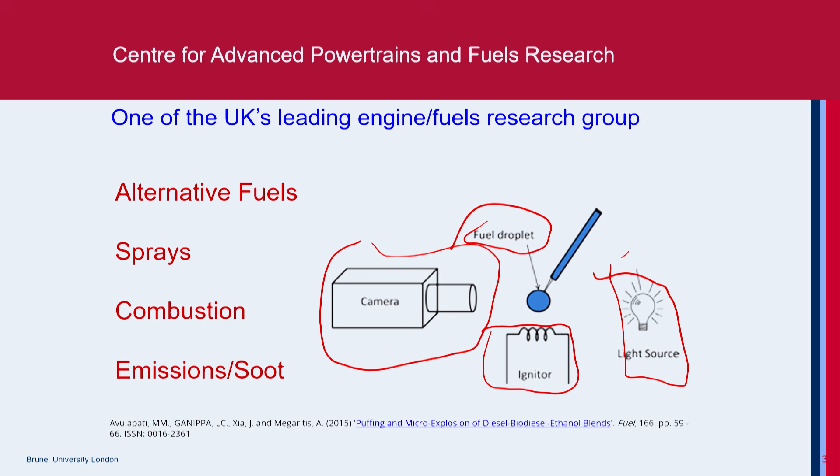Just to give a small setup of the whole lab, I put up some clips of Dr. Madan's experimental work. You'll find this in his paper, which is well cited—a very highly cited paper which we did together at this point. If you have to do any work on fuels, basically you need to have the fuel, a temperature controlled environment, an imaging device, and an illumination source. So this is a simple setup. We have a number of setups with high pressure or reciprocating engines, or at fundamental levels, or even as jet setups.

So that's the background about Brunel and what I'm doing there at Brunel.

So let's go back to the course itself, high-speed flow theory and measurements in jet engines. Often myself and Dr. Madan discuss various research aspects, and this came up, so we thought we'll propose something on this. The topics that will be covered are given there.

We look at the overview of the gas turbine propulsion systems this morning, where we look at the turbojet, turbofan, turboprop, turboshaft, not in detail, just an overview. Then this afternoon, we look into the combustion in supersonic and hypersonic engines based on the Rayleigh flow theory. The course will also cover shock waves and the application of shocks in supersonic inlets. We'll also look at the nozzle flow under supersonic conditions, ramjet and scramjet, and the major part of it is also measurements, where we look at the various optical measuring devices and measuring techniques in this course.

So this is the typical content of this course. Okay, now let's go into today's topic.

It is the overview of gas turbine engines used in aircraft propulsion. So let's start with the basic principle of propulsion.

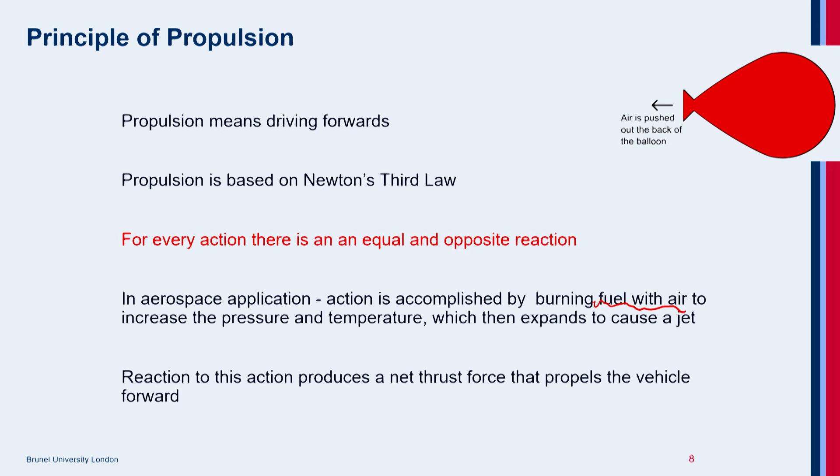Okay, so this is the basic principle of propulsion. Now, if you look at the classification of aircraft propulsion, basically you can classify them into two: air-breathing propulsions and non-air-breathing propulsions. I need not tell anything about rockets, because Sriharikota is not very far from your place, you're pioneers on rocket launching, but for this course we are going to look only at the air-breathing engines.

Until 1940, people were fighting, oh, we need to have a two-stroke engine, we need a four-stroke engine, an air-cooled engine, a water-cooled engine, a rotary engine. Much of the research was focused on reciprocating internal combustion engines since before 1940. Since 1940, the gas turbine developed and jet propulsion starts picking up, and not much talk is there, but still there are a few aircraft with reciprocating engines for training purposes. So we will be focusing more on the jet propulsion engines.

Within that, we'll be looking at gas turbine based propulsion today, and then we will look at ramjet, scramjet. If time permits, we'll look at the turbo ramjet also. Okay, so this is the overview which we'll be covering this morning.

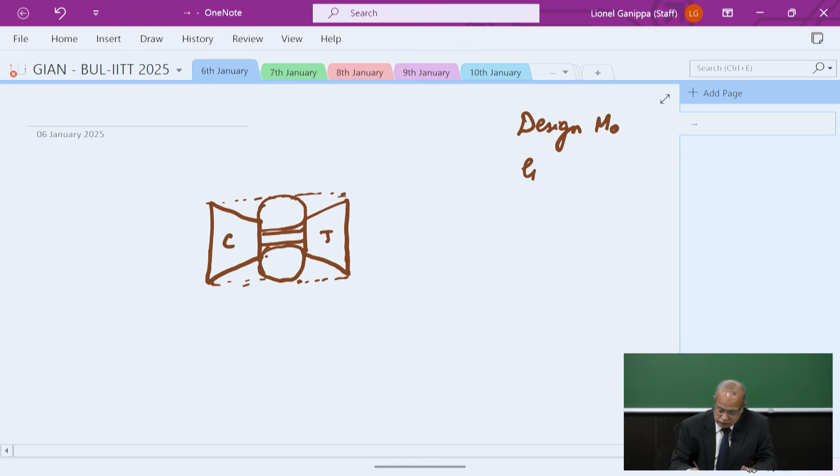Now you need to size these components. This sizing depends on what is the design Mach number, what's the design speed at which you want to fly the aircraft, what is the gross takeoff weight you want to lift, and what is the transonic acceleration - how quickly you want to go from Mach 0.9 to 1.1 or 1.2. That's what we mean by transonic acceleration.

Depending on that, we define the pressure ratio of the compressor, the adiabatic efficiency of the compressor, the amount of fuel injected into the burner, the air to fuel ratio in the combustor, what type of thermal barrier coating we need on the combustor, what is the thermal limit denoted by tau suffix lambda, the maximum temperature the combustor can operate at, the pressure ratio across the turbine, and the adiabatic efficiency of the turbine. I can keep going because they are made up of a number of stages - stage efficiency, number of blades, and blade profile.

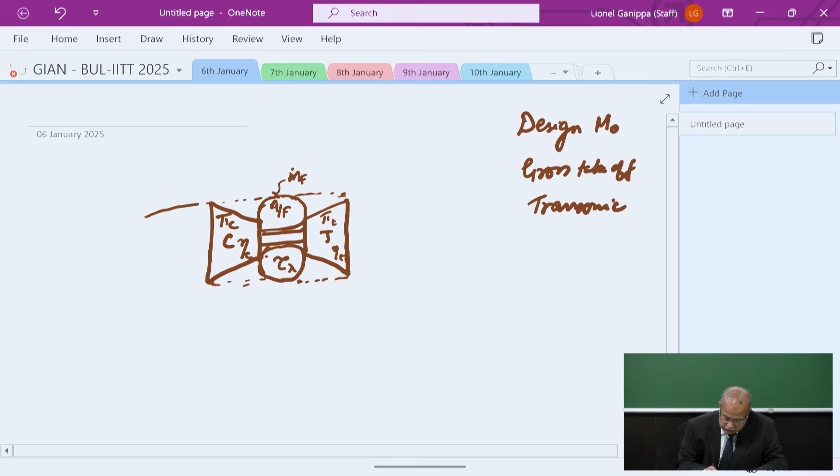This is the fundamental aspect of it. This is called the gas generator. Now if I add an inlet to it, and if I add a nozzle to it, this becomes a simple turbojet engine. So here is the inlet, and here is the compressor.

You're able to see what I was writing out has disappeared. So this is the inlet. So this is the simple turbojet engine. So here is the nozzle here.

The standard aerospace recommended practice is that this is the atmospheric environment at which the aircraft is flying - the unperturbed condition, station 0. Inlet lip, here is the front of the compressor. So exit of the compressor and inlet to the combustor. Exit of the combustor and inlet to the turbine. And here is the exit of the turbine, station 5.

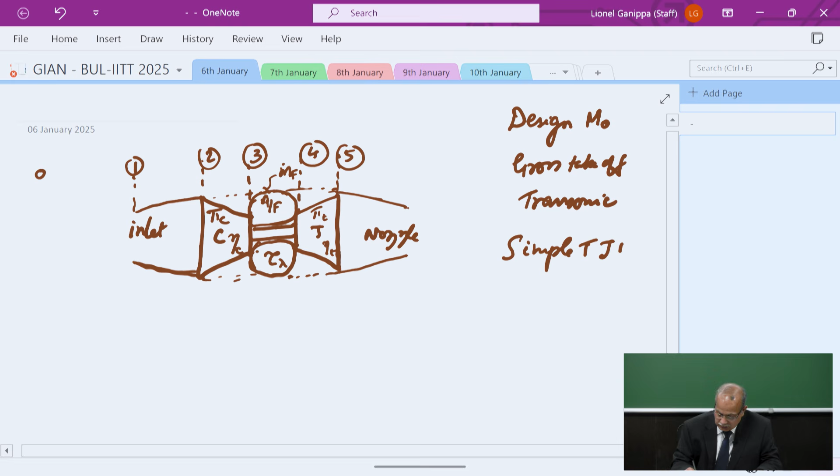Now as I did mention, this is a simple turbojet engine, which we are going to develop further. So there will be some components coming between station 5 and the exit, station 9.

So this means that an aircraft is flying at flight static conditions. The pressure will be P naught, the temperature will be T naught, the density will be rho naught, and the velocity will be V naught, with the corresponding Mach number M naught.

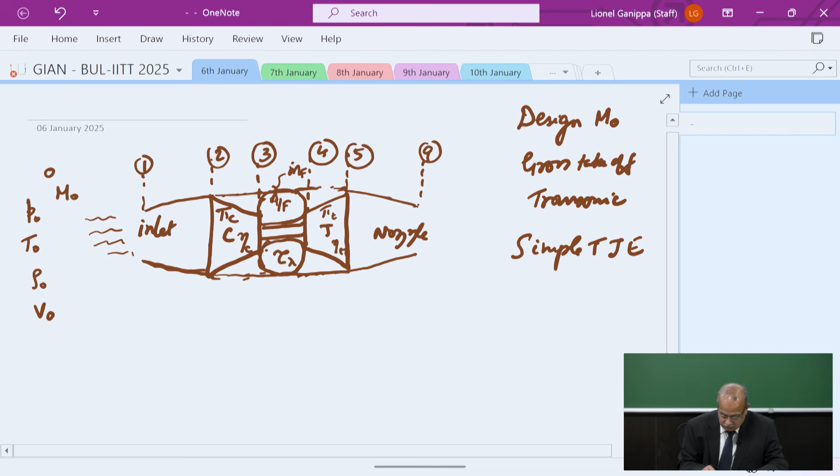So when the air enters into the engine, you can see that the function of the inlet is to decelerate the flow. We are now looking at a subsonic flow. The flow enters into a diverging geometry. So as the flow enters into this engine, what will happen? The velocity decreases.

What is the effect of a decrease in velocity? When I talk about velocity, there is a kinetic energy associated with it, a specific kinetic energy. At this point, the kinetic energy decreases. Here is where the principle of conservation of energy comes into picture. The energy decreases in one form and disappears, but it reappears in some other form, which causes the pressure to increase.

So that is the main function of the inlet - to decelerate the flow, make use of that kinetic energy, and increase the pressure. The whole objective is to improve the efficiency of the combustion process. We need high pressure into the system, so we increase the pressure. At the same time, we need to minimize the losses. That is the main function of the inlet.

Then the air passes through the compressor based on the pressure ratio of the compressor, which is again designed based on the flight speed. As a rule of thumb, the faster you go, you don't need a high pressure ratio because you get the ramming effect there. So based on the pressure ratio of the compressor, you increase the pressure and feed that high pressure air into the combustor.

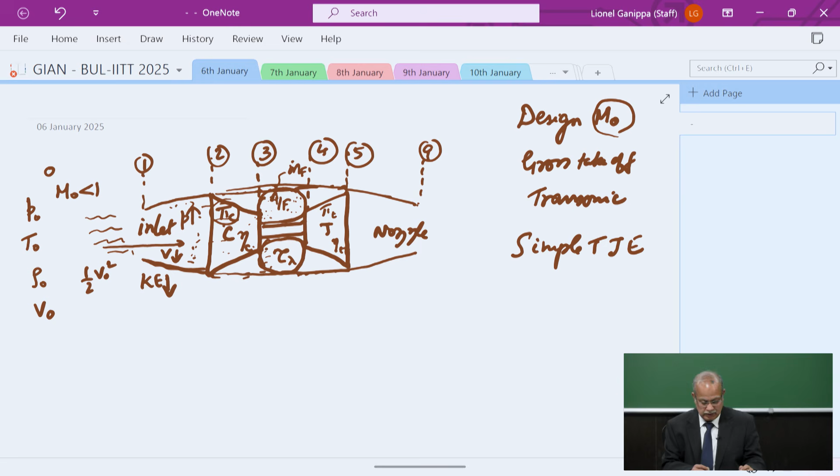Fuel is injected, and fuel and air is mixed into the combustor and burned to high temperature. That maximum temperature is limiting because although it is good to have high temperature, the limitation is material limitation. So we have this thermal barrier coating on these combustors.

The high temperature burned gases will expand through the turbine, and that turbine will produce some work. The work produced by the turbine is used to drive the compressor. Now, the amount of energy left over will be expelled out of the nozzle, and you have this velocity of gas exiting, V9.

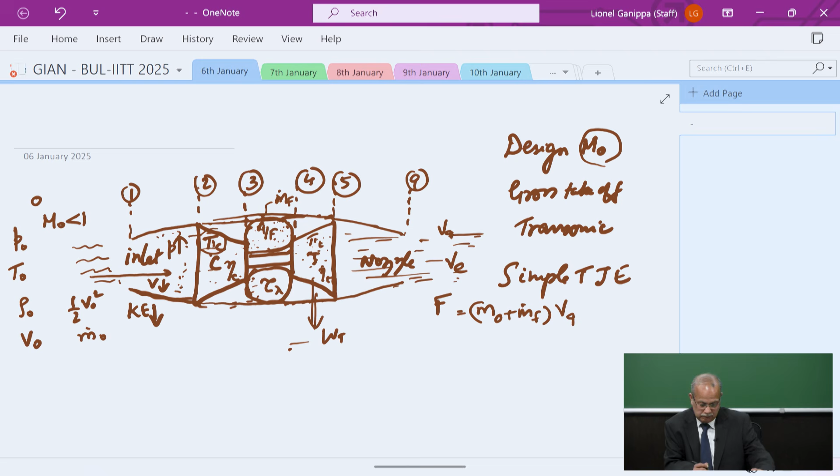Then you produce the thrust, which is equal to the mass coming in, m dot naught plus m dot fuel. This is the gross thrust produced by the engine. So this is the basic principle of operation of a turbojet engine. Now let's try to look at it from a thermodynamic point of view.

So on the y-axis is the enthalpy, on the x-axis is the entropy. This is the unperturbed free stream condition, where the pressure is flight static pressure P naught. Let me represent it on an HS diagram. This is the pressure P naught, and these are the isobars going in this direction.

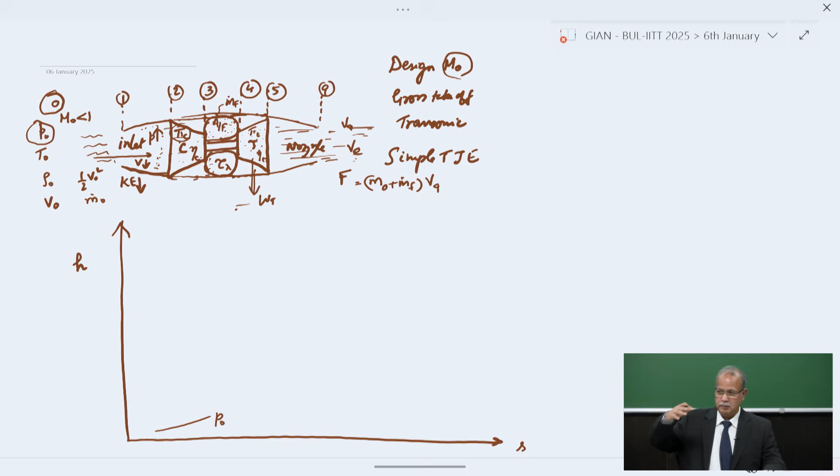Now it is flying at a certain environmental pressure and at a certain temperature. So this is the temperature, T naught. When I say enthalpy, which is nothing but CPT, I can write it as T. Cp is constant here in this case. So here is S naught. These are the initial conditions, the flight static condition O.

Now imagine we are not even going into the engine. I'm going to put a pitot static tube outside. So what will happen here? The flow, if I put a pitot static tube in the flow direction, coming at a velocity, let's say Mach 0.8. Eventually, when it approaches the aircraft at the pitot-static tube, the flow will decelerate, which means the kinetic energy is being lost. Eventually, it comes to the point at the tip where the velocity is zero.

When the velocity is zero, it is referred to as the stagnation state. This process of flow deceleration could be treated as isentropic, so it's an isentropic stagnation state. I'm going to plot that point here. So here V naught is equal to 0, and going to the corresponding pressure is the total pressure, stagnation pressure. So the pressure will increase, and eventually I will have this pressure.

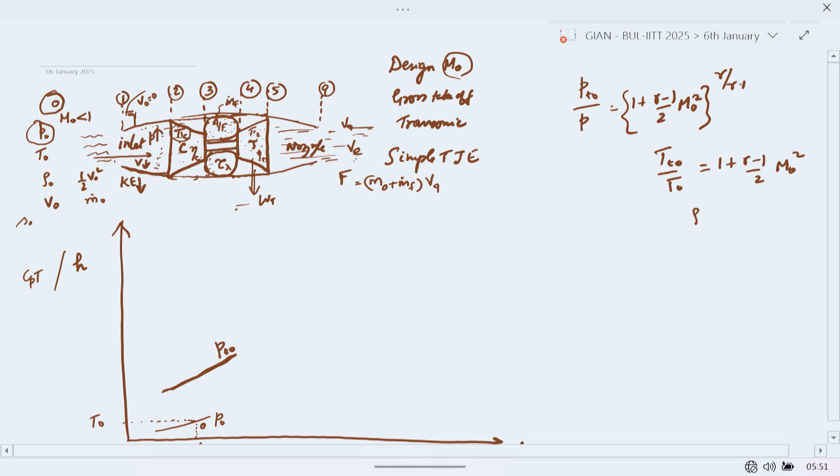So this is PT naught. There is a relationship between this stagnation pressure to static pressure, equal to 1 plus gamma minus 1 by 2 M naught square, power gamma by gamma minus 1. There is also a relationship for Tt naught by T naught, between the local property and the stagnation property, equal to 1 plus gamma minus 1 by 2 M naught square. Similarly, you could say for density also, with 1 by 2 M naught square power 1 by gamma minus 1, but we are not going to look at that.

So here is the static pressure, and this is the corresponding isentropic stagnation condition, and this is the isentropic stagnation enthalpy HT naught. One of the things even in real life applications is the inlet is treated as adiabatic, and also the nozzles are treated as adiabatic. So here it is adiabatic, and here also it is adiabatic.

Now this magnitude is the thermal energy, thermal energy H naught at which the flight enters in. So this is the point here. We have this flight entering at Mach M naught. So here is the thermal energy.

Now here at this point, this is the kinetic energy, which is half V naught square. So what I am writing here is H naught plus half V naught square, which is the energy balance equation, which is the total energy. That's what I write in here now. So it's H naught plus half V naught square is the total energy, and total energy remains constant here.

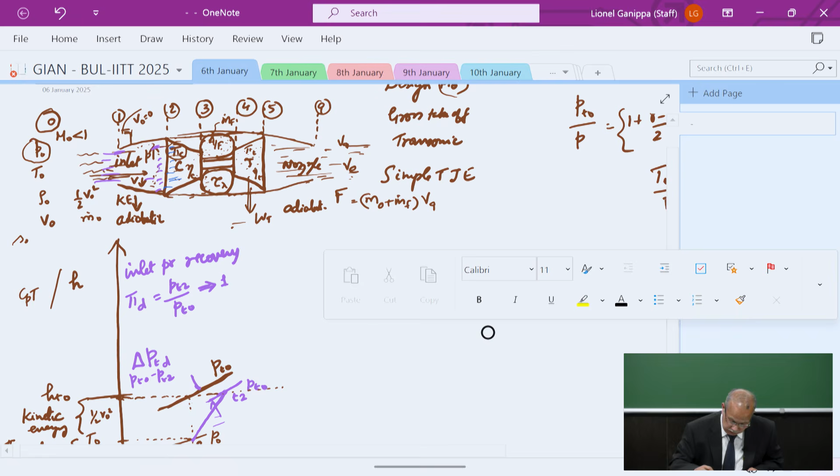So now at this point, air has gone through the inlet and is about to enter the compressor. Depending on the pressure ratio, you have this pressure here, PT3. In the actual process, there will be a number of small stages, and this is how the pressure increases in the compressor, passing through stage, rotor, stator arrangements. The pressure increases to PT3, which depends on the pressure ratio of the compressor and its adiabatic efficiency.

Once air has entered the compressor and is pressurized, it enters the combustor where air and fuel are injected. Combustion takes place at constant pressure, but in reality there will be a pressure loss, delta P, the total pressure loss in the burner. So here it is PT3, and here this is T4, here it is T3. This is where the fuel is injected, mass of fuel is injected, and fuel and air mix to form an appropriate mixture, which then burns and increases the temperature.

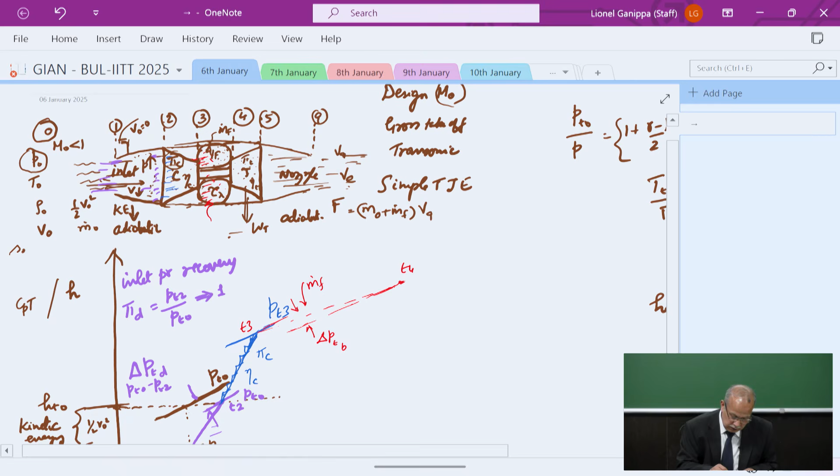After which it will expand in a turbine, depending on the expansion ratio of the turbine, reaching pressure PT5. So here is pressure PT4, pressure PT5, this is the state T5. Then whatever energy is left will be expelled out of the nozzle, expanding to the ambient conditions, flight static P9. So it starts with a static pressure, goes to stagnation, then ends up with 1 here. This is the nozzle pressure ratio, the total pressure ratio across the nozzle. These are all geometrical parameters related to the nozzle, and it expels out at this point with velocity, from which we can calculate the thrust and so on.

So this is the typical cycle diagram of a simple turbojet engine.

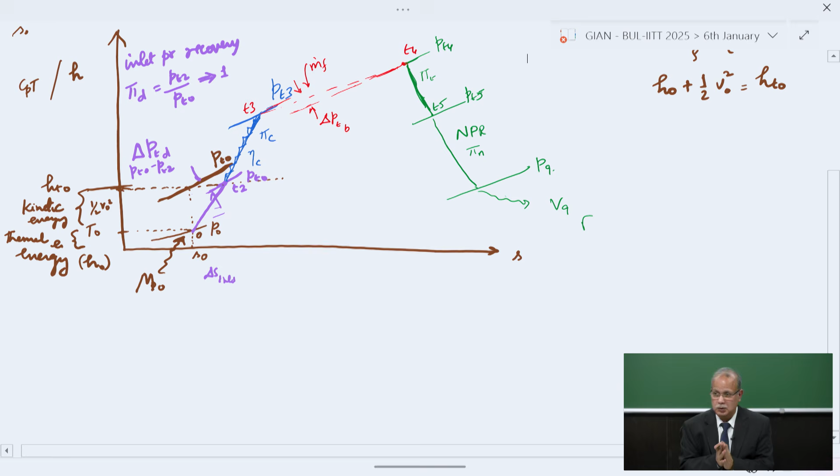Now let's look into the development of this simple turbojet engine, because not always do we want to operate it like this. At times, if there's a sudden threat, you need to escape — that's what we call a dogfight, one aircraft chasing another. You drop the bomb, your adrenaline level goes up, and you have to take a steep climb. In that case, you can't perform that maneuver with this existing engine.

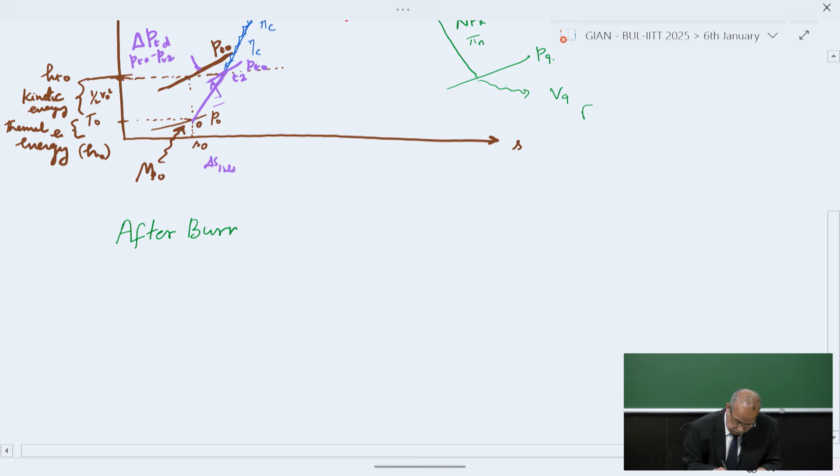So you need to modify the engine by including a component called an afterburner. An afterburner is a device that could be fitted to this simple turbojet engine so we can have thrust augmentation. If you're going to double the thrust, the fuel consumption will quadruple, so we can't always use the afterburner. You use it only for a very steep climb or emergency conditions, and then switch it off.

The afterburner has some casing, an outer casing. It has a perforated liner, and before the charge enters, it also has a pre-diffuser.

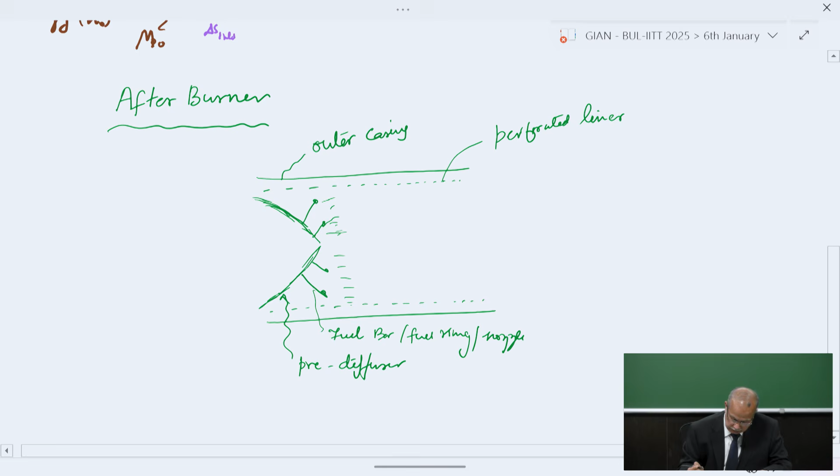Now we want to make sure that the flame is there in this combustor, participating in the combustion. To do that, we need something called flame holders. The function of the flame holder is to create a local recirculation zone, which increases the residence time of the fuel and air to be mixed and burnt, producing a much higher temperature, which must then be expelled out.

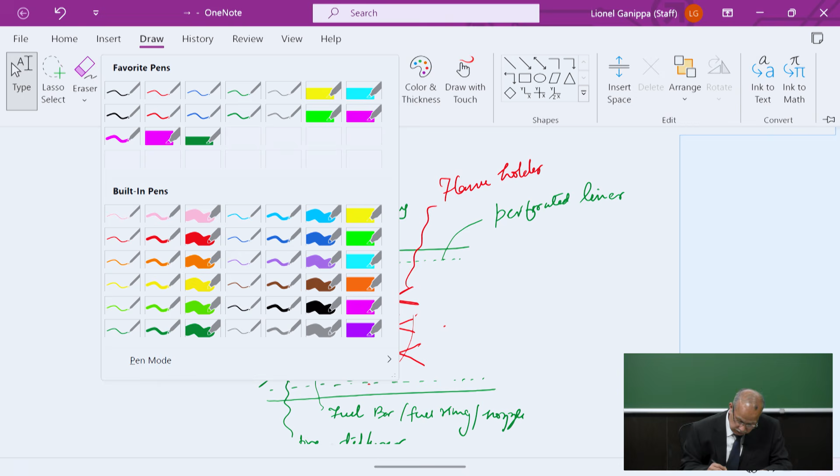To get the benefit, we need to go for a nozzle which is of convergent divergent geometry. When you have a convergent divergent geometry, Mach number will be less than 1 as the flow passes through it, approaches M equal to 1 at the throat, and then it accelerates to M greater than 1. So you have the benefit of momentarily boosting and augmenting the thrust to go to high subsonic or low supersonic speeds.

So this is the afterburner. Now where is this afterburner going to be fitted in this engine? Let's look at this one here.

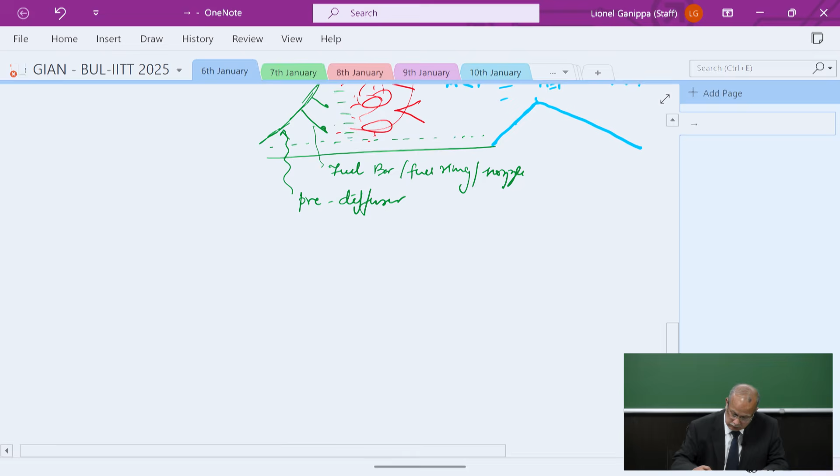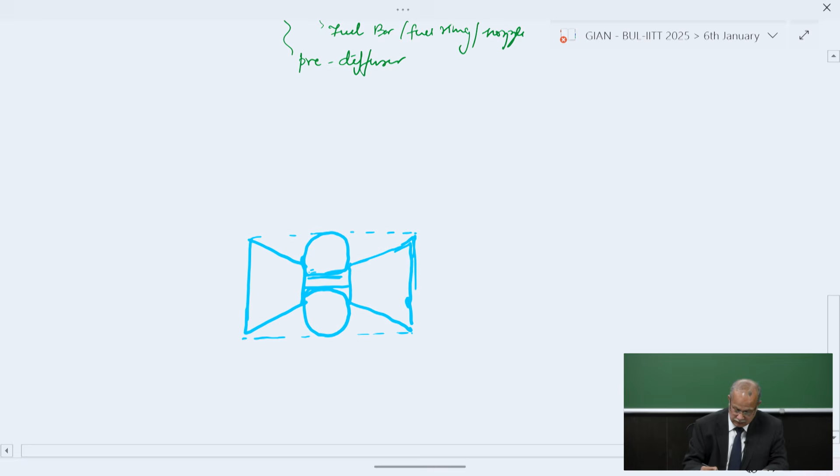As we discussed before, here is the compressor, here is the turbine, and this is the combustor. This is basically the gas generator, and this will have an inlet. This is the shaft that couples the turbine and the compressor.

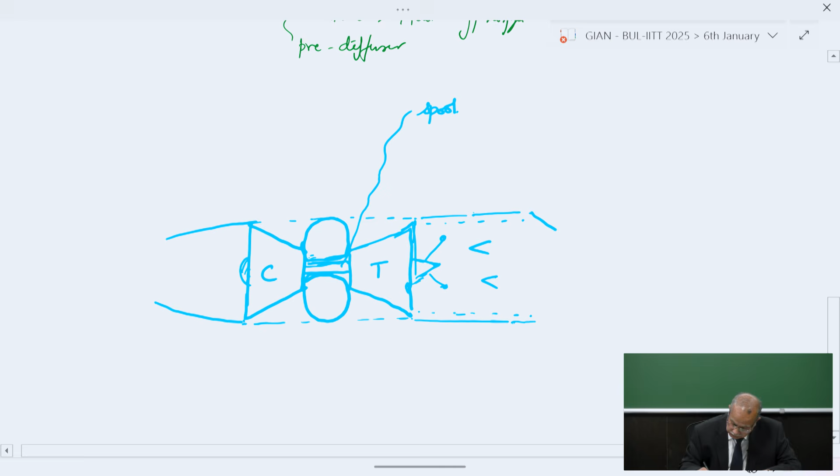Sometimes this shaft is also called a spool. And here is the fuel bar, and this is the afterburner with a perforated liner in it. And then you have this convergent divergent geometry.

Here you can see the unperturbed free stream condition. This is the inlet lip, the frontal face of the compressor. Here is the end of the compressor and the combustor. Here is the burner, so here the mass of fuel is injected.

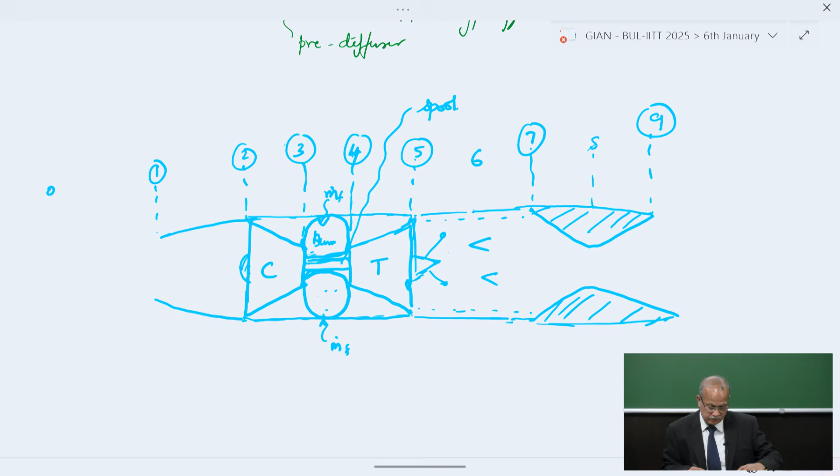And it is burned. Here it is station 4, and here it is station 5. Now the whole afterburner unit is treated as a pipe with an afterburner device, and here is the 7 end of the afterburner combustor. This is the throat, area 8, and this is 9. So you can see that a simple turbojet can be modified by including an afterburner.

If we include the afterburner, we are able to momentarily increase the thrust. The benefit can be obtained by having a convergent divergent nozzle, which we'll be discussing a bit later on. Now let's look at the cycle diagram for this application.

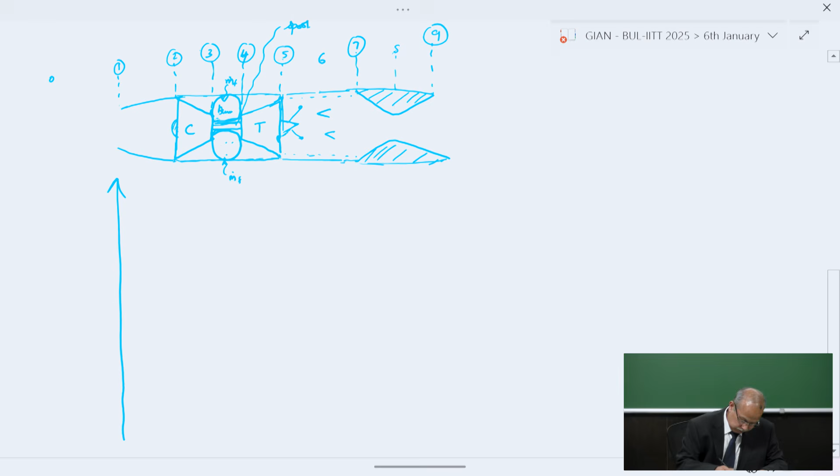So here is the enthalpy, this is the entropy diagram. Here are the unperturbed free stream conditions. Here is H naught, thermal energy, S naught. Now here is the flight stagnation condition, PT naught corresponding to T naught. The total energy in the inlet is constant.

So this is the pressure PT2 at the face of the compressor, state T2. This is the point here, T2. Then the charge will enter into the compressor. It will be pressurized. Here it will be pressure PT3, and here is the state T3. So this is the state here, total state 3.

Then in the combustor, this is the actual path through which the combustion takes place. This is the pressure PT4, this is the state T4. In other words, this is the maximum thermal limit, which is denoted by tau lambda. Tau lambda is basically the enthalpy at this particular point: HT4 over H naught. That is the maximum, in non-dimensional form. So maximum temperature, or cycle temperature, or maximum turbine inlet temperature — these are the various terminologies here.

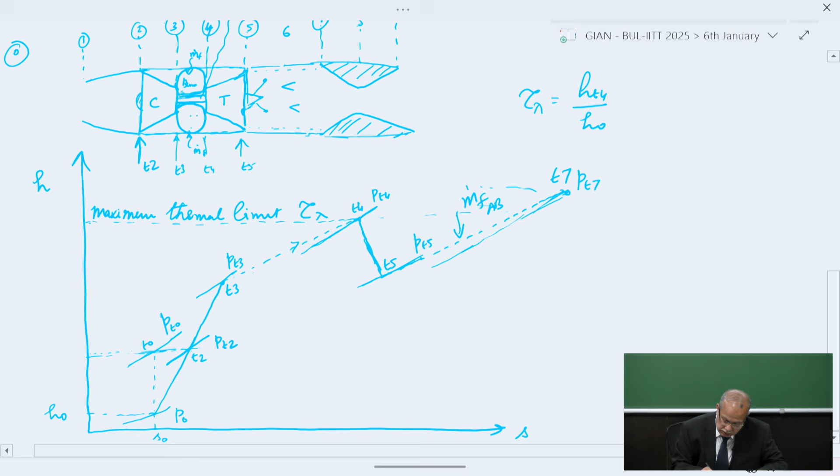Now it enters into the afterburner, so here again fuel is going to be squirted out. The pressure at the exit is PT7. Here combustion is taking place with the mass of fuel injected in the afterburner. So this is T7. You can see that, depending on the combustor properties, you can go up to this level, or keep it to the same level as the previous combustor thermal limit. Anyhow, to differentiate it, I can say this is the thermal limit in the afterburner.

Then it expands in the convergent divergent nozzle, so you're able to produce thrust here, down to the P9 point. So this is how the cycle diagram will look like for a simple turbojet with an afterburner. So we got some fundamental understanding now. Now let's go into the real applications of it.

So this is the inlet, and the screen has changed now. Yeah, you will see — here is the inlet. This is the part of the inlet here.

So all the process I've explained, the physics is happening here. The kinetic energy is utilized to increase the pressure. And then you see this compressor. The compressor which is closer to the combustor is normally called the high pressure compressor, and the turbine which is closer to the combustor is called the high pressure turbine. We'll come back to this later.

Now the air that is being pressurized in the inlet is being further pressurized in the compressor. So it's an axial flow compressor, and the direction of flow is in this direction. There is rotation - you have a rotor blade and a stator blade. The rotor will apply the force and increase the pressure, and the stator will be shaped as a diffuser, increase the pressure, change the flow, and feed the flow into the next stage of a rotor and a stator. So that's how it is.

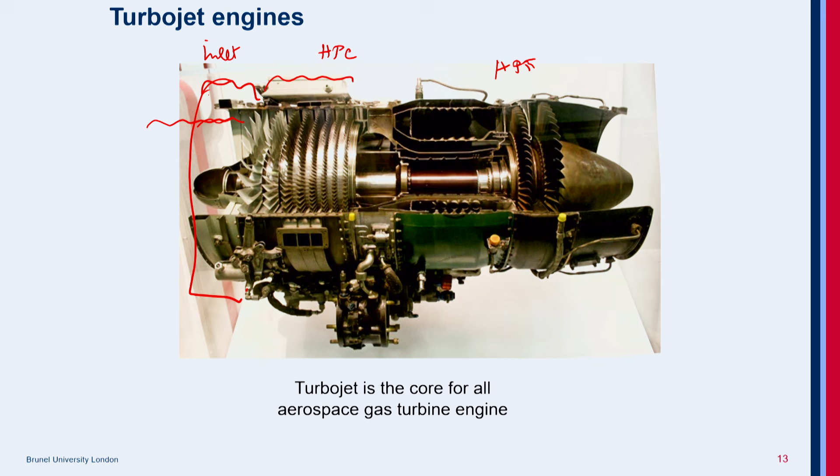So a rotor and a stator comprises one stage. A compressor will have a number of stages, maybe 8 stages, or it can have 2 sets of compressors: low pressure compressor and high pressure compressor. So depending on the number of stages or number of compressors, the pressure ratio will vary.

So the high pressure air that is pressurized further in the compressor, after coming from the inlet, will enter into the combustor. This is the combustor. Here the fuel is injected and mixed, and it is burned to have an optimum fuel air ratio. F is the fuel air ratio, which is the mass of fuel by mass of air.

And then the burned gases will be directed to the turbine where you get the power. That power is transferred to the shaft to drive the compressor. The amount of energy that is left out is going to be expelled in the nozzle.

Okay, so now let's look at the general working principle of the jet engine. Air is admitted from the surrounding environment to the front end of the engine, which is the intake. All the blue part is the cold section of it, and the red is the hot section of it.

Now, most of the time, the function of the inlet is to decelerate whatever the Mach number is. Say if the flight Mach number is 0.89, it has to reduce it to Mach 0.4 to 0.5 or 0.6, because most modern compressors can handle flow only up to that range. That's the main reason for having an inlet - otherwise it can damage all the blades. So we decelerate the flow in the inlet such that the Mach number is at the right range so it can be handled by the compressor.

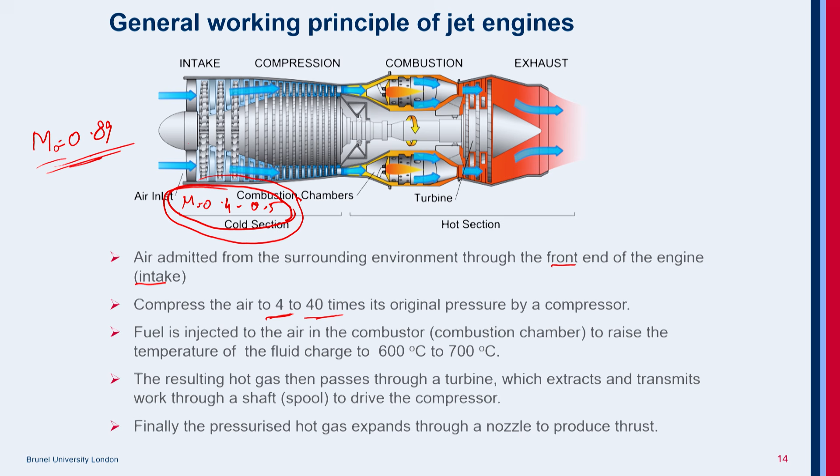Okay, in the compressor the charge could be pressurized. Modern compressors can go up to 40-45 times the pressure ratio. That's the term I've been using here, so this is pi c equal to maybe 45 or something - that's the maximum limit.

Then the pressurized air enters into the combustor and the fuel is injected and mixed with the air, and again the temperature increases depending on the mixture, fuel, calorific value, and other aspects. Then the hot gases will expand through the turbine, which extracts and transmits work to the shaft to drive the compressor. Finally, the pressurized hot gases expand through the nozzle to produce thrust.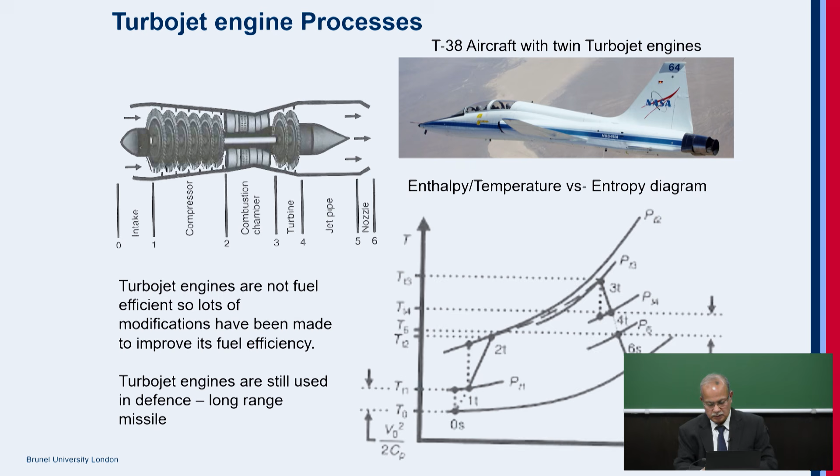So the schematic we explained before is now a bit clearer here. These turbojet engines are not fuel efficient, so a lot of modifications need to be made to improve fuel efficiency. But they are still used for defense applications because fuel consumption is not an issue there, and also for missile applications. I have explained this process of enthalpy and entropy separately, so now it's much easier to understand looking at the global scale here.

Now, one of the ways you can modify a simple turbojet to augment the thrust is to include an afterburner. So here is this simple turbojet, and here is the one with the afterburner.

So here is the afterburner device. This is the fuel bar which I mentioned, you can see that here. This is the fuel bar, and this holds the nozzle, and here are the turbine blades - you can see this here. The turbine blades will direct the air to the afterburner.

So the cycle diagram, after it has expanded to PT3, PT4, then it will have a combustion process in the afterburner, then expansion will take place. This is how the cycle diagram will look. Understood?

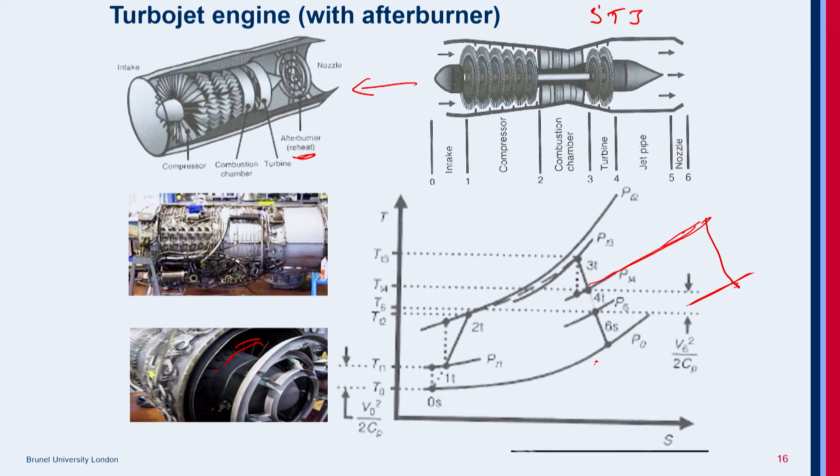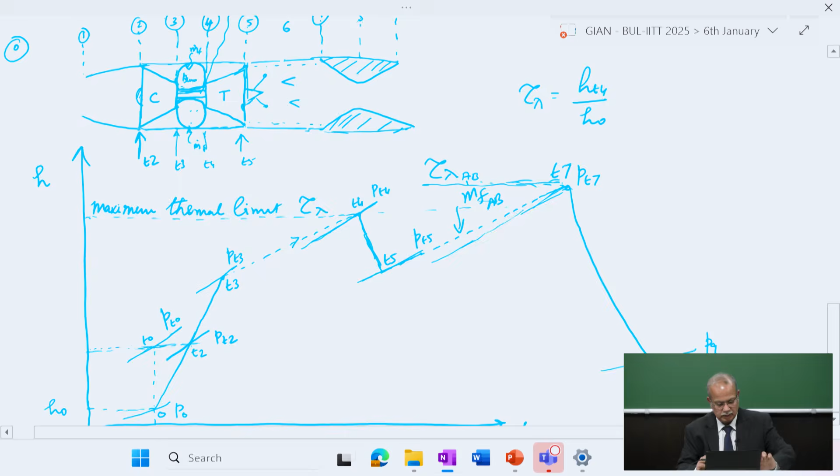So now let's look at the modification of a turbojet engine. Most commercial aircraft are really concerned about fuel consumption. They put a lot of fuel tax because they want to make sure they are fuel efficient. So let's see how the principle works - it still has the gas generator.

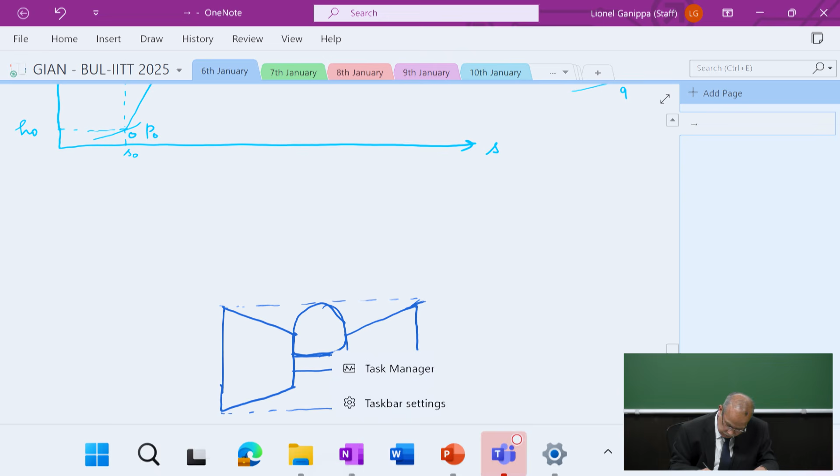Here is the combustor. So here is the compressor. Here is the burner. Here is the turbine.

This is the gas generator. So the principle of going for a turbofan is basically an energy recovery process.

The energy, this is the gas generator, we have seen already. Any further energy that is left out, energy that could be harvested, is done through incorporating a turbine, which is called the low pressure turbine or a free turbine. Sometimes it is also called the power turbine.

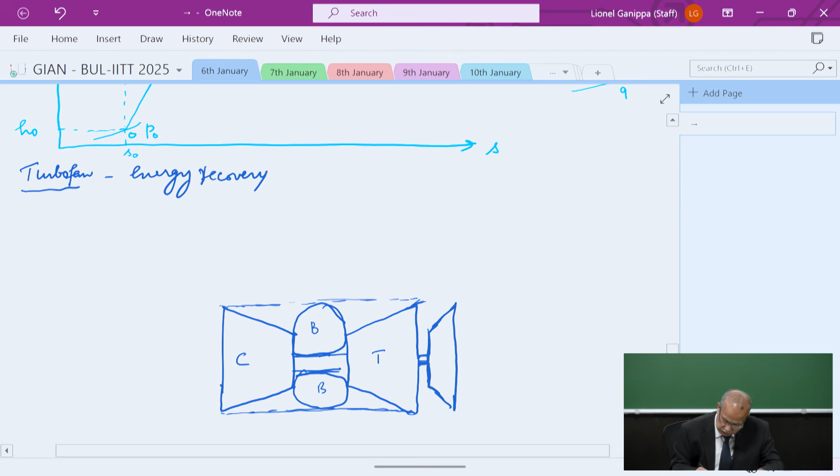Now you can see that this shaft is of different coupling to this one here. Now use this shaft power to drive a fan, and place the fan inside a duct.

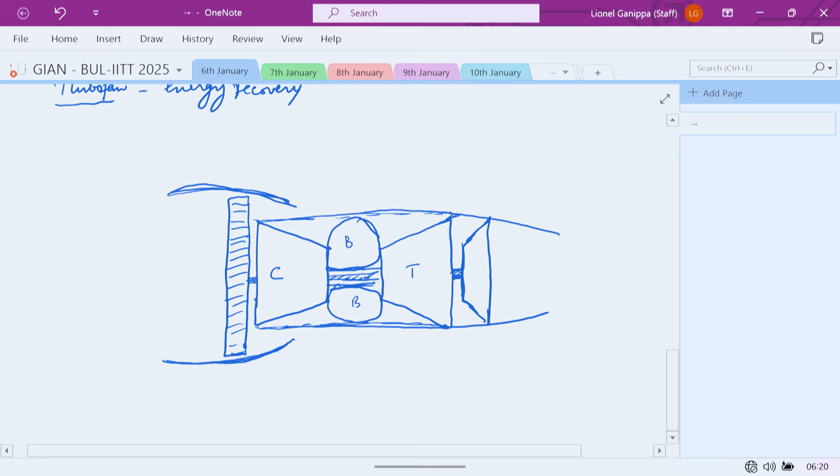So you can see that the central core of the jet engine is the gas generator, which is the basic building block. Whatever energy is left out is harvested in the low pressure turbine.

So this is the high pressure turbine. The turbine which is closer to the combustor is the high pressure turbine, and the compressor that is close to the combustor burner is the high pressure compressor, and so on. So this is the fan. Use this energy from the low pressure turbine to drive the fan.

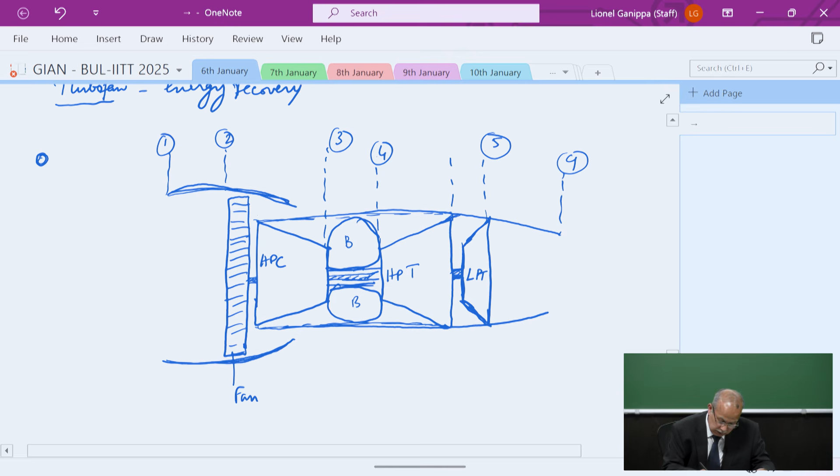So the station points are as follows. This is the flight static condition, inlet lip, and this is the frontal face of the fan, station 2, here it is 3, here it is 4 - you treat it as one device, there are different ways to do it. And then here it is 9, in between 4.5, and here it is 13 and 19. These are some of the standard ways through which they are numbered.

So the principle is the air is drawn into this. You can see the frontal area is much larger. So when the frontal area is larger, you have a much higher mass of air drawn, which means it is going to be a benefit for the thrust, since m into v is the thrust.

Now let's look at this one here. So the air is drawn to the inlet, and here you can see this is the air that is drawn into this inlet. So I put two colors here. The color which is red is the only mass that enters into the core of the engine to the high pressure compressor. Just like how it's happening in the turbojet, it is being compressed. Now only a small amount of air is drawn in, relatively, so the amount of fuel consumption will also be reduced.

It is burnt and will expand to the turbine, and still that energy that is left out will be harvested to drive the fan, and then it will expand to this nozzle to produce thrust. Now that part of the air which is not entering is called the air that is bypassed, the mass flow of fan, capital F. The fuel is small f, capital F for fan. So this mass is bypassed.

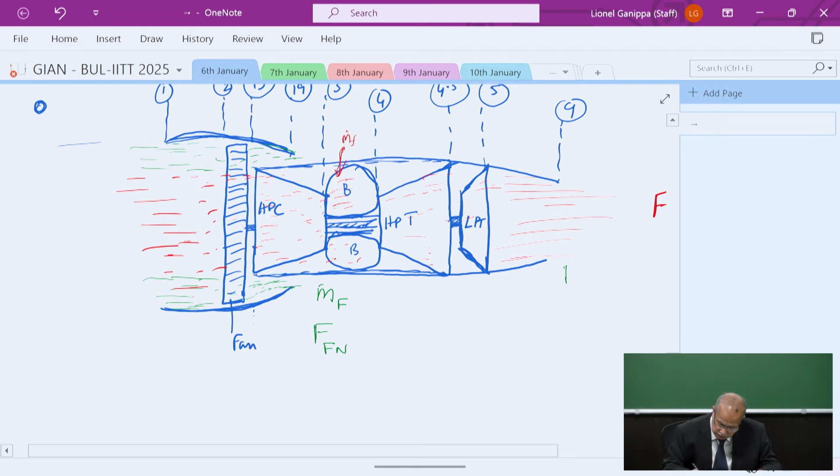So they are pressurized here, and then it enters. Now what you can see here, again there is a nozzle. This is the thrust, the thrust that is produced by the fan nozzle. Here the thrust is produced by the core nozzle. So this is hot, this is cold. But nevertheless, you are going to get the thrust from this.

So here velocity is V19, and we are going to get a velocity coming out here, it is V9. So when we look at the thrust, it comes from the fan nozzle plus thrust from the core nozzle. Because you're not going to add any fuel to this green part of the air that is being bypassed, the engine becomes a bit more silent compared to a turbojet engine. So you're not having more engine noise added to it.

And then we define a parameter which is called the bypass ratio, alpha, which is the mass of air that is bypassed without participating in the combustion. Bypass ratio.

Now all of you understood this one, yes?

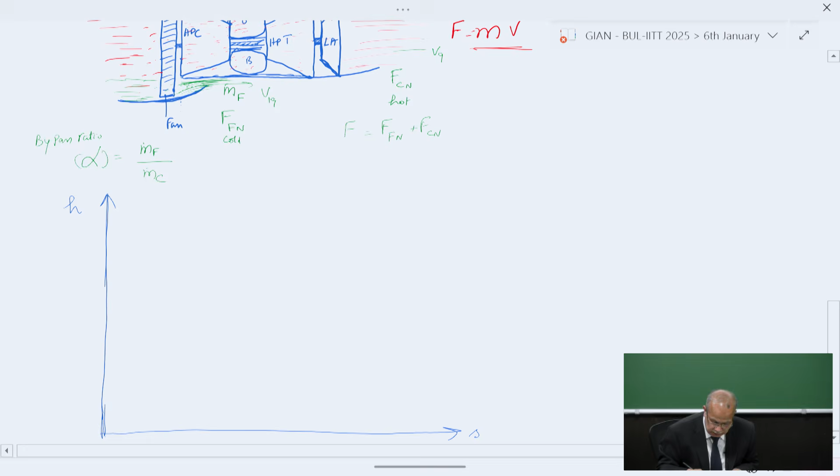Now let's try and understand the whole process on an enthalpy-entropy diagram. Here is the unperturbed free stream conditions, having pressure P naught, T naught, S naught, H naught, M naught, V naught. So here is the pressure P naught, this is the enthalpy H naught, this is the entropy S naught. This is the unperturbed flight static state.

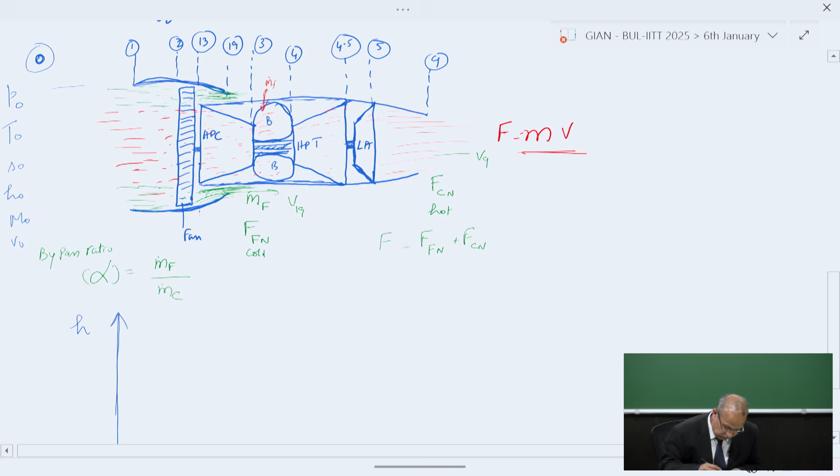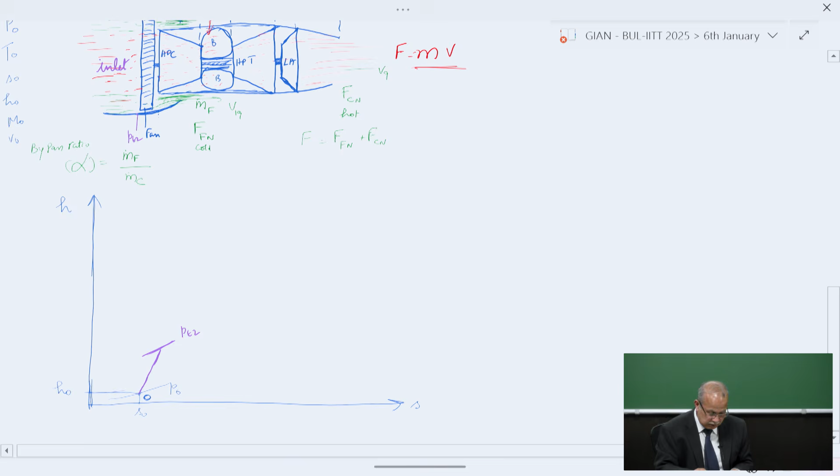From here, the charge enters into the inlet. So here is going from... what are the points here? So here it is, the pressure PT2. PT2, this is the pressure here. So this is the state T2. So this is happening in the inlet.

After which, the total mass of air will pass through the fan, and the fan will also have a pressure ratio, pi F. Depending on the pressure ratio, we'll be able to increase the pressure up to this point. What is the state point here? PT13, and then this is T13.

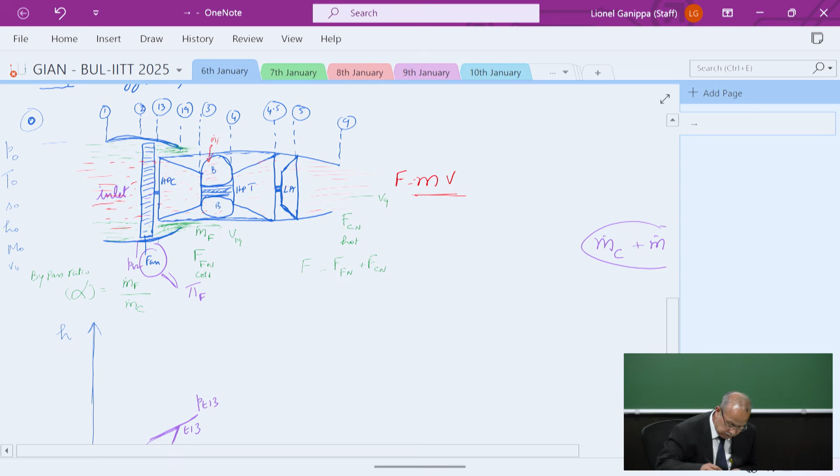Now I'm going to look at the core flow. What will happen to the core flow? The core flow will pass through the compressor, and it will be pressurized to PT3. So this is T3 in the compressor. This is fan.

And then the core flow will pass through the combustor, to T4. This is the pressure PT4. Hit point T4. Then it expands, so here is the combustor. Now here is the high pressure turbine, expands here to PT4.5, then again expands further in the low pressure turbine, PT5, and then it expands in the nozzle to produce the thrust.

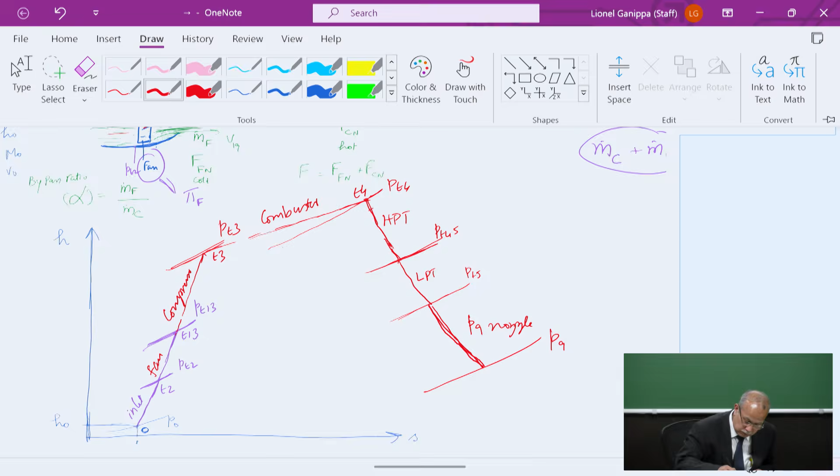But this is not the full picture. The full picture is that there is air which is here at this point. After it has entered into the fan, it is not entering into the core, it is being bypassed, and then it is expanding from this point. Now here you see P19, T19. So this is the cycle diagram for a turbofan engine. This is called turbofan.

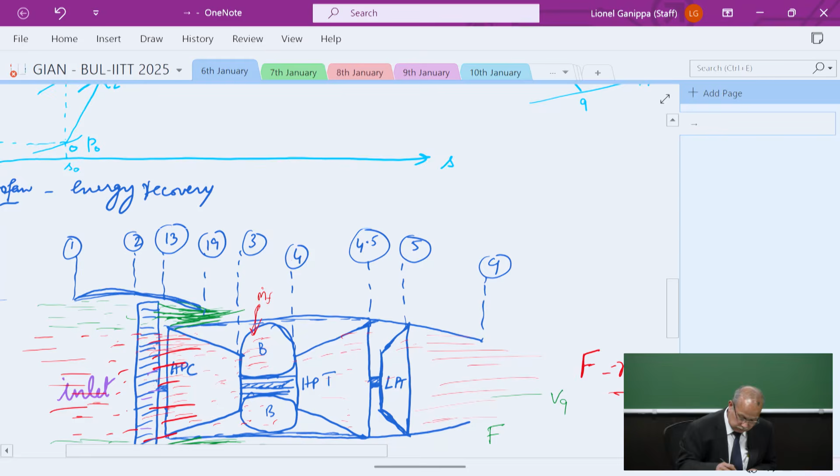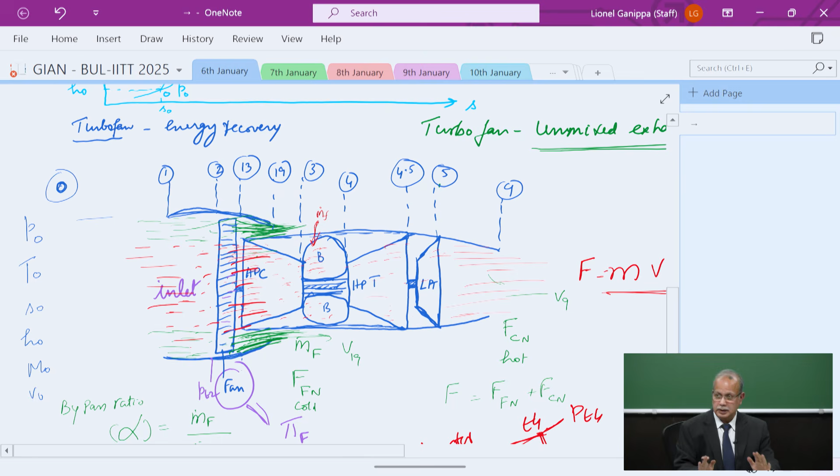Now here it is called unmixed exhaust turbofan engine. The reason why it is called unmixed exhaust is because the air that is being bypassed is not allowed to mix with the burn gas. Red and green are totally isolated, they are not mixed at any point in time. So that is called unmixed exhaust turbofan engine.

Now the advantage of this is because they are not mixed, we can go for high bypass. Higher the bypass, much better. You have better fuel consumption, it will be much reduced because you're getting more thrust from the air without participating in combustion. Okay, so that's the benefit of it. So high bypass engines.

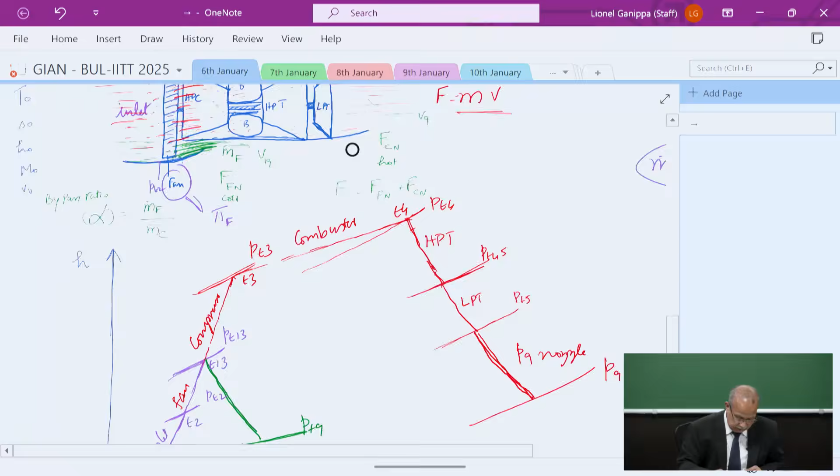The next concept of the turbofan engine I'm going to look at here is starting with the gas generator. Let me give this one here, it's a turbofan. This is the mixed exhaust configuration. You don't have much of this in operation now because of some limitations, but nevertheless there are some limited flights which use it, majority of them use unmixed exhaust.

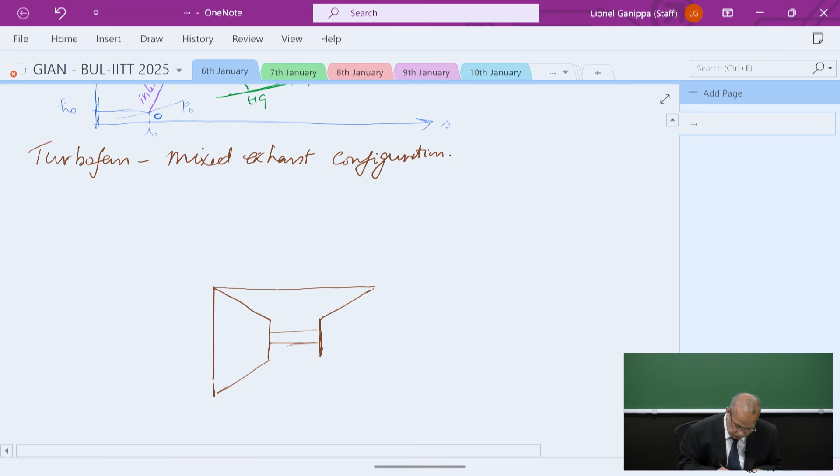So here is the gas generator. Here is the high pressure compressor, here is the burner, high pressure turbine, and whatever energy is left out, this is spool 1, is going to be harvested using a low pressure turbine, a different spool, which means that when you drive these components at different speeds, it is better for internal aerodynamics because you can streamline the flow according to the design specifications of each component. Otherwise, if everything is coupled, you can't optimize the internal aerodynamic characteristics of it.

So here is the second spool from which you run the fan. The configuration is very similar to what we have done before, but then it is enclosed in a duct.

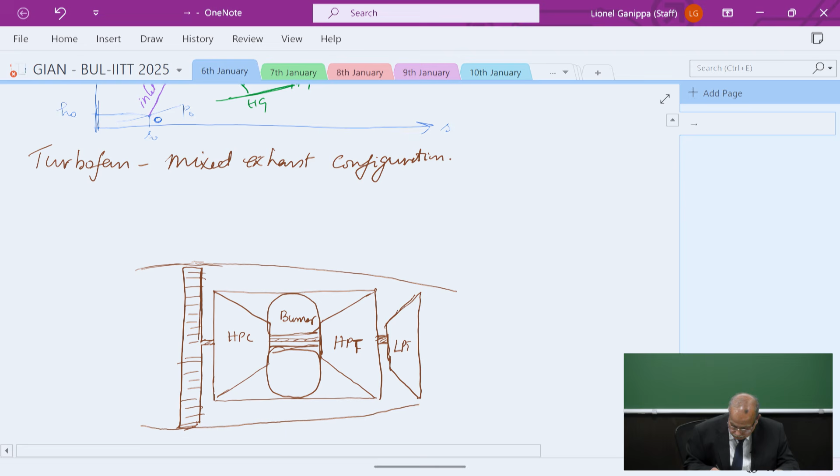Then this is a nozzle here. So you're able to appreciate it now. Here is the unperturbed free stream condition. This is the inlet lip, the frontal face of the fan, point 2. This is the exit of the compressor, point 3. This is the exit of the burner, point 4. And this is the exit of the turbine. This is the exit of the nozzle, point 9.

So here this you can have it as 4.5. Here it is 6, I'll put the word here, mix M, because the bypassed air will mix at this particular point.

Let's go through this configuration here. So the air is drawn into this engine, is drawn into the engine.

So here the purple part also is there. This is the total amount of air that is drawn, but only the purple part is bypassed here. Let's come back to the bypass bit later. So this core will pass through the high pressure compressor, pressurized, burn with the fuel mixed with air, and then it'll burn. Then you have the high pressure turbine and the low pressure turbine, and then it will come to the mixing chamber before it expands out.

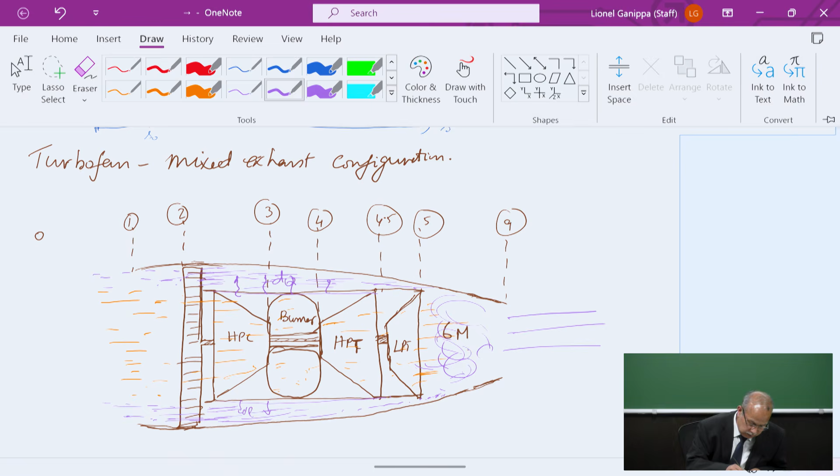So as the purple part of the air, the bypassed air, passes through, the temperature increases by gaining heat from the actual combustion process. You're recovering heat here. Then it will go in and start to mix with the central core. And then it is coming out as one nozzle, one jet mixed with hot and cold. So that's the reason why I call this mixed exhaust stream configuration.

So this is a mixed exhaust stream configuration. The critical element of this is that the pressure must be perfectly matched. If there is a mismatch in pressure, then there will be a reversal of the flow, and that will damage the fan blades and bring the flight down. That's the reason you can't operate this at very high bypass. You can operate this at very low bypass because you want to make sure that the pressure in the mixing zone and the flow streams are perfectly matched so that there's no reversal of flow taking place. So pressure settling is very important.

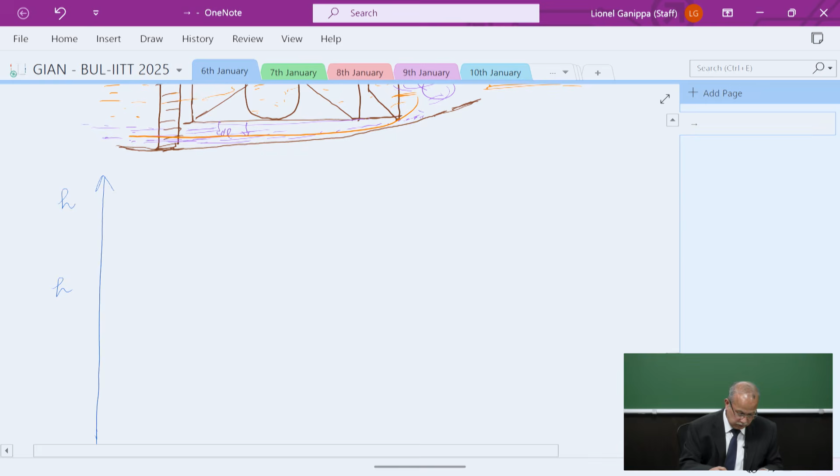Let's look at the enthalpy entropy diagram. This is the unperturbed free stream conditions, P0. This is the flight static state, H0. In the inlet, it's being pressurized, PT2, T2, which is further pressurized in the fan, P13, T13. Then you have the core flow entering into the high pressure compressor, to T3, here the pressure is PT3.

Then you have the combustion taking place in the combustor, T4, here's the pressure PT4. Then expansion taking place in the high pressure turbine, then expanding further in the low pressure turbine. Let me stop there at this point. So here is the high pressure turbine, then it's the low pressure turbine.

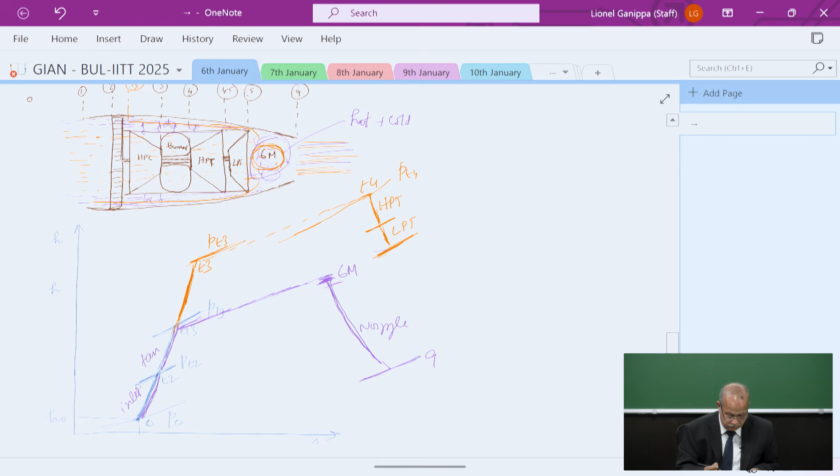And from here, it will expand in the nozzle. So this pressure difference is very important. Otherwise, you'll have a reversal flow taking place. Understood, all of you?

Okay, so now let's go back to the PowerPoint slides, what we have seen. The turbofan was basically invented as a way to recover the waste and reduce it. Most commercial and military aircraft are powered by turbofan. So here is this turbojet. Here is the modification, what we have seen. I use this low pressure turbine to drive the low pressure fan.

And that's what we have seen. And this is the bypass duct, what you see here. So here you can see there's a portion of air that enters the core of the engine, and the rest of the air is bypassed, flowing around the outside of the core of the engine in a bypass duct. So bypassed air is ejected as a cold jet around the engine, which is unmixed exhaust flow. Or sometimes it could be mixed with hot core gas before it's ejected. So we looked at the two configurations here.

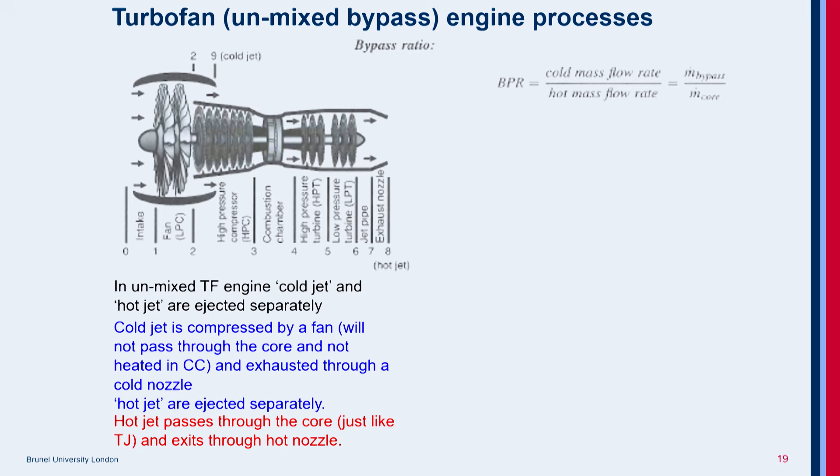So the objective of the bypass system is to increase thrust without increasing fuel consumption. That's the main advantage of it. This is achieved by increasing total air mass flow, but there's no need to burn fuel to heat the bypassed air. This also makes the turbofan engine quieter and produce more thrust at low speed than a turbojet engine. So here you see this diagram, what I have already explained. Here is the fan expansion. This is the nozzle expansion. This is the unmixed air bypass. So here is the bypass ratio.

Here is the mixed bypass, a mixed exhaust bypass turbofan engine. Bypassed air is mixed with hot core gas in the mixing chamber and ejected out together through the same core nozzle. The static pressure of the hot and cold streams where they mix should be the same. Otherwise, there will be a backflow, a reversal flow, which is not a desired phenomenon here, and could damage the blades.

There should not be a significant pressure difference between either stream. Engine back pressure affects the mass flow and the fan pressure ratio. Therefore, the fan pressure ratio, pi F, and the bypass ratio, alpha, are not independent of one another because of these reasons. So engines are designed such that the velocities of the two streams are as close as possible, and the total pressure difference between the streams is minimal.

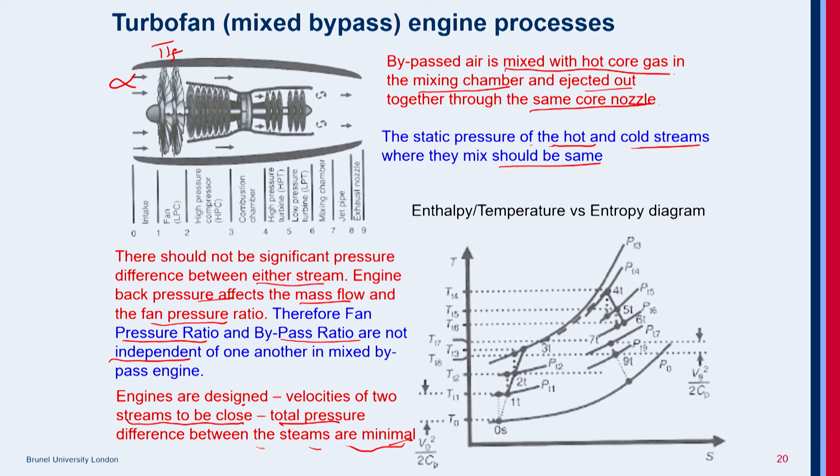And this is the cycle diagram, which now you'll be able to understand much better because we have covered it.

Now let's look at the third configuration, which is a turboprop engine. We already looked at the turbojet engine, improved it to have an afterburner for thrust augmentation, and looked at the cycle diagrams. We also looked at developing a simple turbojet to improve fuel consumption by recovering the waste, in a turbofan engine, in two configurations: one unmixed, the other mixed. Now the third configuration is a turboprop engine.

Turboprop engines can't fly at very high speed because they have a propeller. Because of the propeller, there is a critical speed up to which you can operate it. Otherwise you'll end up having wingtip vortices, which result in the formation of shock waves, which is not desirable. This drag will always affect engine performance.

Turboprops are essentially a jet engine attached to a propeller, so the principal configuration is the same. You recover the waste after the gas generator; that energy is recovered in a low pressure turbine or power turbine, which is used to drive the propeller. Where we used to drive a fan, now that configuration is used to drive the propeller.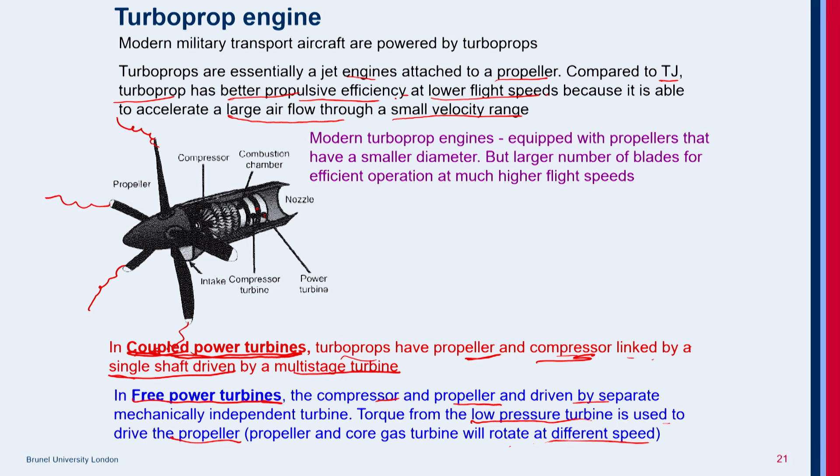The limitation is that you can operate it at low speed but not at high speeds, meaning you can't fly at high altitudes. There are also losses due to vortices. But developments have led to using smaller propellers with more blades per propeller. So modern turboprop engines are equipped with propellers that have a smaller diameter but a larger number of blades, for efficient operation at much higher flight speeds.

These are called prop fans. Now again, the problem of tip vortex is still there, causing losses. To avoid that, the tip of the blade is twisted like a scimitar sword — twisted to minimize the tip vortex. So you can see the swept back leading edge, just like how the wings of an A320 have a winglet.

Have you seen this? Wings will have a winglet — that's to minimize tip vortex losses. So here in propellers, you have this swept back arrangement to minimize the tip vortex. So here you see these turboprop fan aircraft — this is a turboprop, and these are the prop fans.

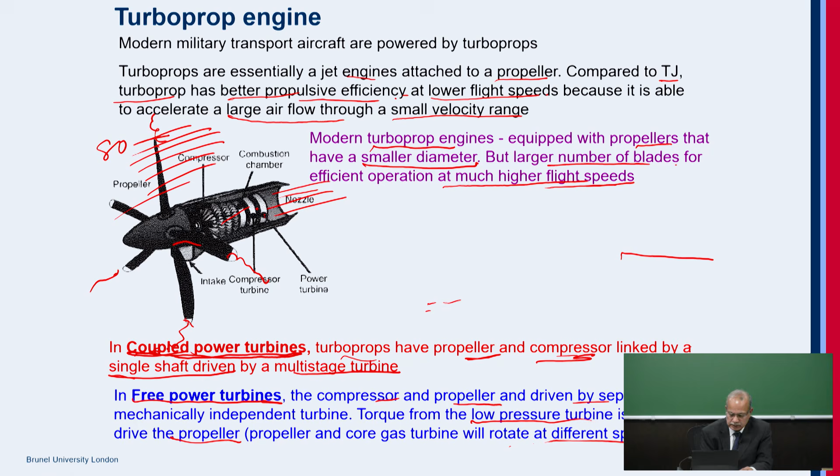This power sharing has to be designed at the production stage itself, because the size and dimensions have to be taken into consideration during the design stage. You can't just do it at the end. So the power sharing between the propeller and jet is a decision made at the design stage of the engine for a given operating condition.

The cycle diagram is very simple. You have compression, combustor, turbine, and nozzle. Since you have gone through it before, we will now move to the last configuration, which is the turboshaft engine.

Turboshaft engine is not a jet engine at all. It's a shaft, there's no jet. All the power that is produced is converted as shaft power. If you have a worm gear arrangement and drive a blade, then it becomes a helicopter. So turboshafts are mainly used for driving helicopter rotors instead of a propeller.

Almost all aircrafts have turboshaft engines, which serve as an auxiliary power unit used to generate electricity and other auxiliary air supplies in the aircraft. Helicopter engines are generally designed so that the speed of the rotor is independent of the spool rating speed inside the core of the gas generator.

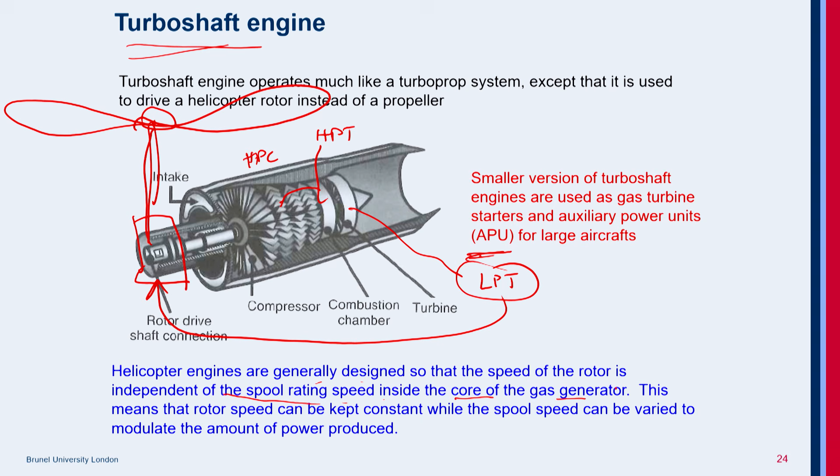Here you have the low pressure turbine, which is used to drive this shaft, and the high pressure turbine, which is used to drive the high pressure compressor. So you can have an independent rotational speed. You could also make gear arrangements so that you can keep the rotor speed constant while varying the spool speed.

Here you see this configuration. There is no ramming effect because it's running at very low speed. All you need is a streamlined flow of air entering into it, almost like a bell mouth entry. Here you have this reverse flow combustor: flow comes back, mixes with the fuel, burns, and then the expanding flow produces shaft power, which is used to drive the rotor.

There is no jet used to produce thrust in turboshaft engines. The turboshaft helicopter engine uses shaft power to generate thrust from spinning rotor blades; no jet is produced by expanding exhaust gases through the nozzle. The turboprop engine uses shaft power to drive the propeller, which generates most of the thrust, though a small, negligible fraction of jet thrust is produced by exhaust gases expanding through the nozzle.

Here you see this comparison of the architectures we have studied. We looked at the simple turbojet, and simple turbojet with an afterburner. We looked at the turbofan, unmixed exhaust turbofan, and the mixed exhaust turbofan. We also looked at the turboprop engine and the turboshaft engine.

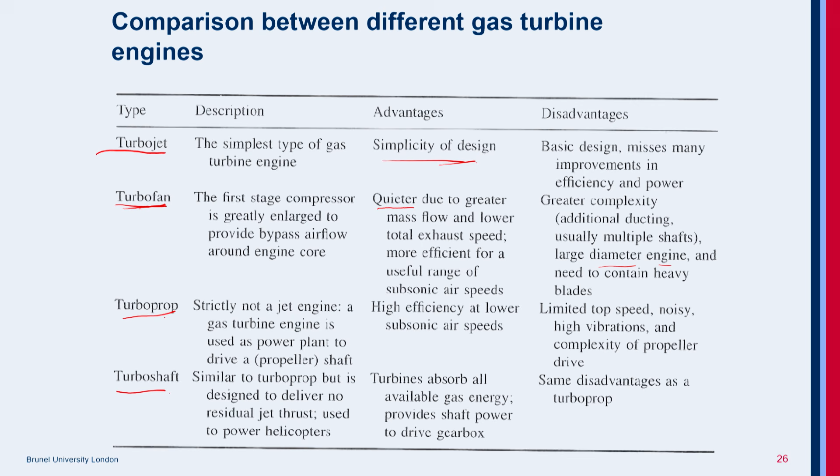Next, for the course, we will spend more time on this arrangement, which is the ramjet engine. So far, what we have seen is gas turbine based propulsion systems which had rotary components, a compressor and a turbine. Now, when we go for very high speed applications where the ramming effect takes over and builds up the pressure, of course, the configuration is still similar.

You have an inlet, a combustor, and a nozzle. The pressure buildup is through the inlet system, which doesn't have any rotary component. Instead, you have a lot of shock waves in it. We will be covering those things tomorrow. But then the combustion takes place in the combustor, and the expansion takes place in the nozzle.

Now the configuration designs are different for ramjet and scramjet. In the ramjet, you see it's a convergent-divergent inlet, and the nozzle is a convergent-divergent nozzle. But if you look at the scramjet, you have just a convergent inlet and just a divergent outlet.

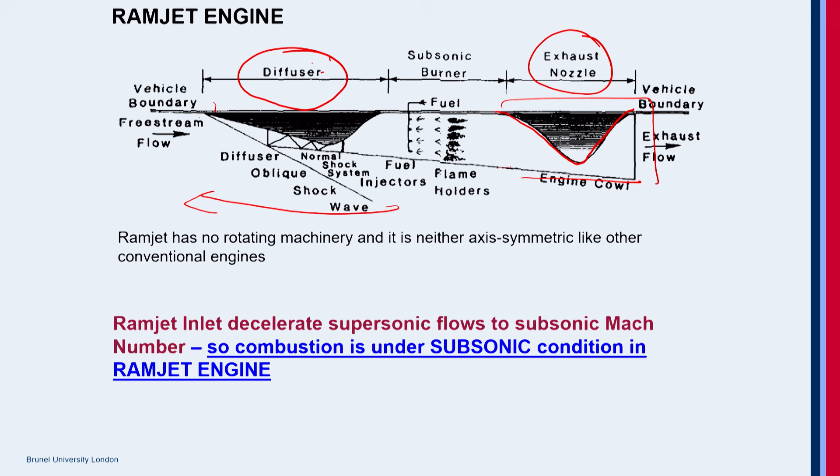Because the reason is we want the combustion to take place under subsonic conditions. We want to make sure the Mach number is equal to or less than 1. That is taken care of by the shock train configurations, which we'll discuss tomorrow. So though it is flying at Mach 3 to Mach 5, when it comes to the combustor, it is subsonic combustion taking place because the air enters the combustor at M less than 1. So the combustor burnt gases leaving the combustor are still subsonic, so you need to accelerate it. So you have a convergent section at M equal to 1, and then you have the divergent geometry. That is the arrangement.

You have no rotary components here. When it comes to ramjet propulsion, we'll be discussing these details later. At the entry into the combustor, we are not decelerating it to subsonic, it's still supersonic. At the end of combustion, M is supersonic. If we have a convergent geometry, it will reduce the flow, but we want to accelerate it, so that's why we have only the divergent geometry.

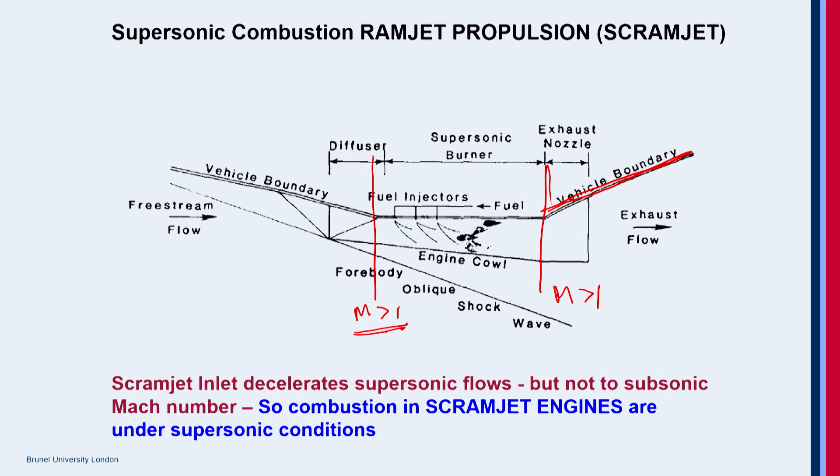So anyhow, we will be looking at these things in detail. I just wanted to cover this also: gas turbine engine propulsion and hypersonic engine propulsion. The commonality is that it also has an inlet as a gas turbine engine inlet, and then it also has a combustor. Combustion can take place either at subsonic or supersonic conditions.

If it's a scramjet, it is supersonic combustion, M greater than 1, but if it's a ramjet, M is less than 1. And then you have the turbine or the nozzle system for these hypersonic propulsion applications. So I think with this we can conclude this morning's lecture, and then after lunch we can start with the next topic, which will be on combustion theory.

Do you have any doubts or anything? Yeah. Anything you want to ask?

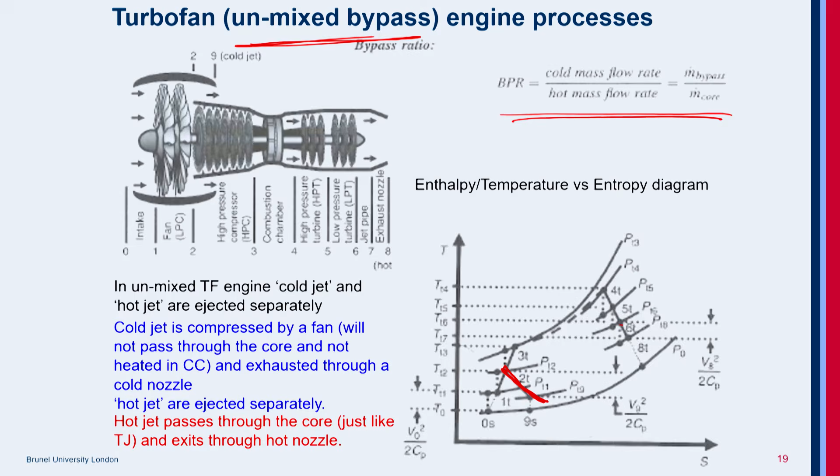What is the typical pressure ratio of P0 and P9? Because both are at the entry point P0 and the exit point P9. So what is the typical pressure ratio between them?

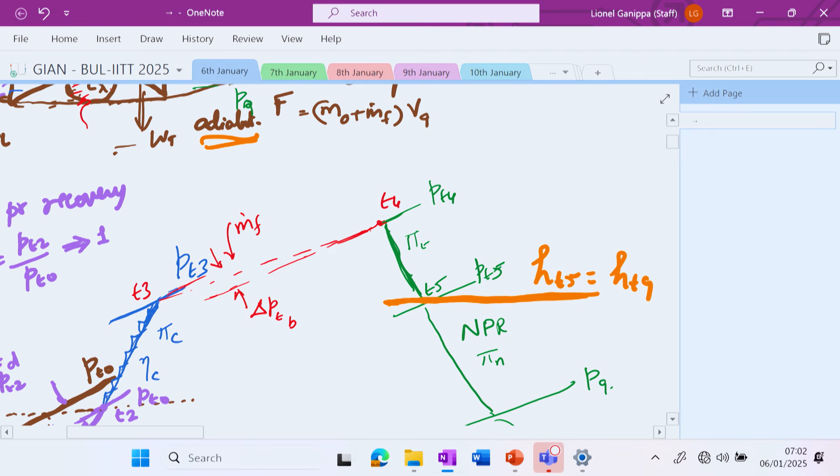So that is from the nozzle point of view, let me explain this a bit more at this particular point. Just like how I explained that the inlet is adiabatic, the nozzle is also adiabatic, which means that the total temperature at this point remains constant, total energy, which means enthalpy HT5 is equal to HT9.

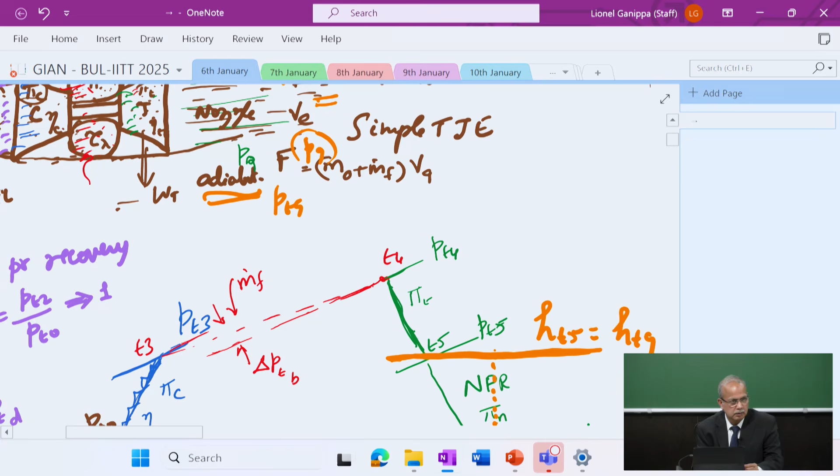HT9 again comes to the question you asked. So this is the temperature T9. The total temperature is TT9 and the pressure is P9. The total pressure is PT9. So if it's going through an isentropic process between P9 and this point, that is P9. The question you asked, what's the difference between P9 and P0? If I place a pitot static probe here, I will be able to measure PT9, the stagnation pressure.

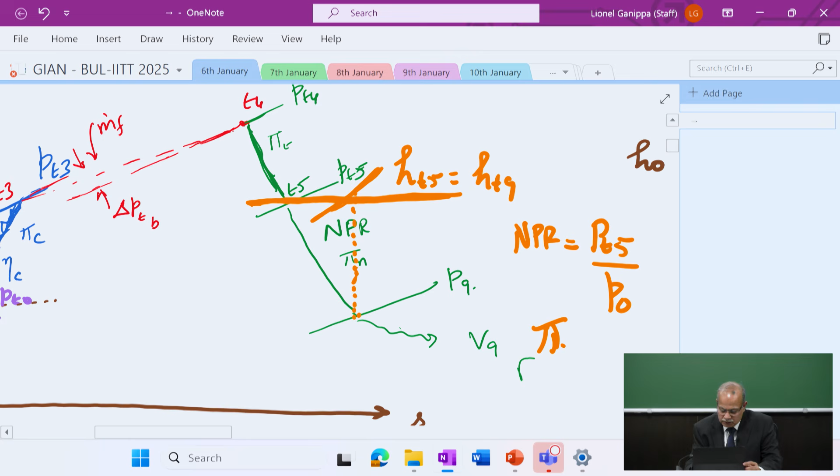Understood? Okay, so that will be the stagnation pressure here. Now, this ratio from here to here is the nozzle pressure ratio, PT5 by P0. That's the maximum potential available for the nozzle to expand. And then the total pressure ratio of the nozzle is PT9 by PT5, the total pressure ratio across a nozzle. And this nozzle will have an adiabatic efficiency.

Now, the question you asked is very important, because that defines what kind of flow comes out. If P9 is less than P0, it is overexpanded. If P9 is greater than P0, it is underexpanded. So this is the check we'll be doing later on, comparing P9 and P0. If there is a difference, then it could be either underexpanded or overexpanded. Depending on that, the flow structure coming out of the nozzle will be different.

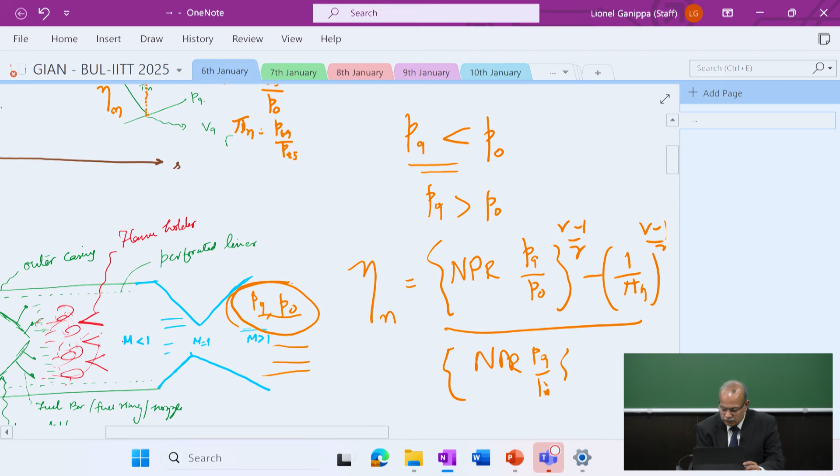So that's what you see, that the nozzle efficiency term, and then P9 and P0 play an important role. If P9 is equal to P0, then it is perfectly expanded.

But to make it perfectly expanded, most modern applications are coming with a variable area geometry nozzle, which means you can vary the area so that P9 equals P0, which is the optimum design configuration. But that is also difficult because P0 is also changing constantly.

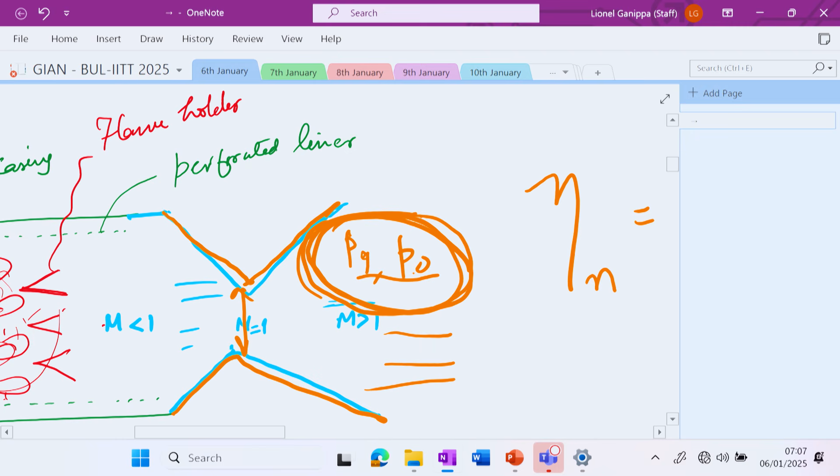Yeah, the height. So depending on the environment at which it is flying, we may end up in a situation where it could be either overexpanded or underexpanded conditions. Depending on that, the flow structure, the shock diamonds that are formed will be different.

I think we'll be discussing that on Wednesday, day after tomorrow. We'll be looking at this aspect, P9 and P0.

Another question: already you have told that during this turbofan in mixed conditions, the velocity or pressure of the bypass air and the combustion air coming from the nozzle - if these two are not exactly same, either it will backflow the bypass air or it will be creating an obstacle to the nozzle exhaust. So especially again the same question, if P0 is constantly varying, how do these two exactly match?

Is it totally a design concept, or is some control system there? Because even a small deviation in the pressure, if the two pressures don't match, it will either backflow or it will restrict the outlet flow of the nozzle.

Very critical actually, I think. Through one of my student projects, we did a simulation for this condition. There is a limit, a small limit up to which you can operate it. But primarily, it is a design feature - the fan bypass ratio and the fan pressure ratio and the bypass ratio, they have to be matched.